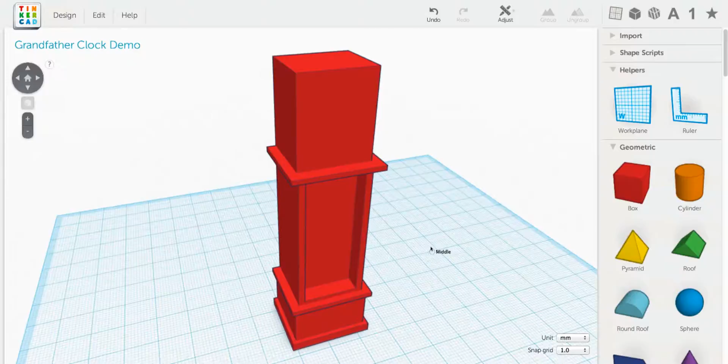So here we are, and we have the body of the clock. You can see I've already started adding a little bit of detail. I added a recess here. It's what's called when it's a hole but not all the way through, just sort of a recess in the body. That's important for giving things a sense of depth.

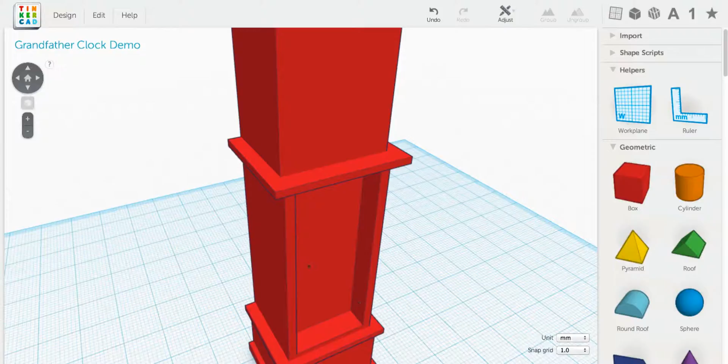You don't want it to all be flat just on the front. So it doesn't have to be very deep in order to get that to work, but we'll do that again up here. But first we want to create that molding that's on top of the clock, so do something that sort of looks like that.

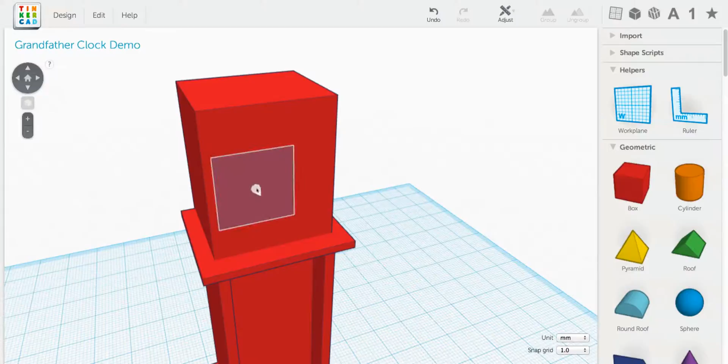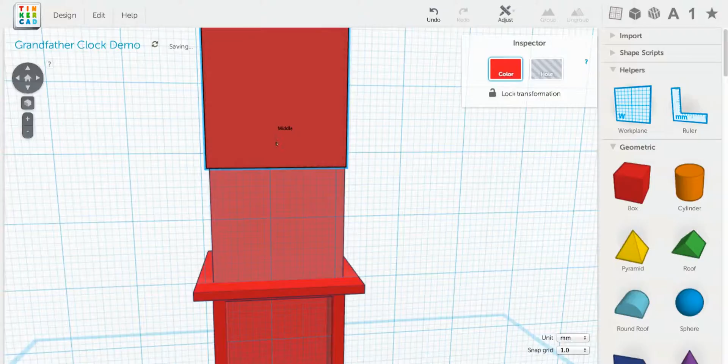I'm going to simplify it a bit, but to get started, we're going to bring out a box and shrink it down to be 2 millimeters deep. And then move it up here. And it needs to be a little bit wider than the face of the clock. Let's nudge it into position here.

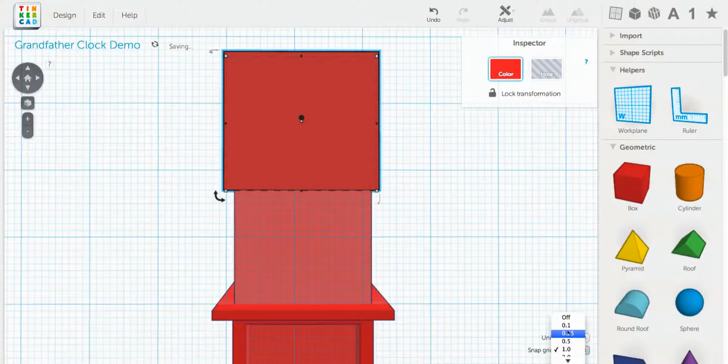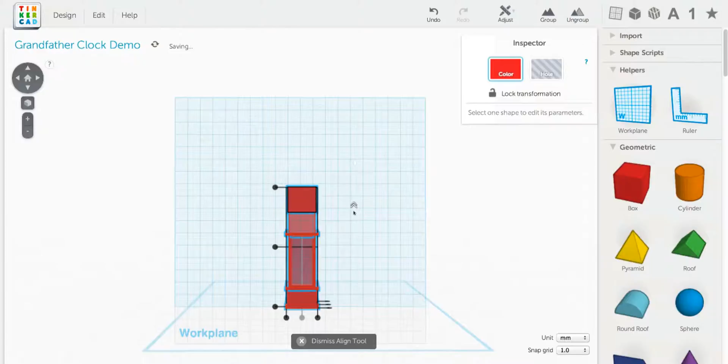We want to leave a roughly square area down here. Let me group all of that for the time being, and then center that ornamental piece on top right there.

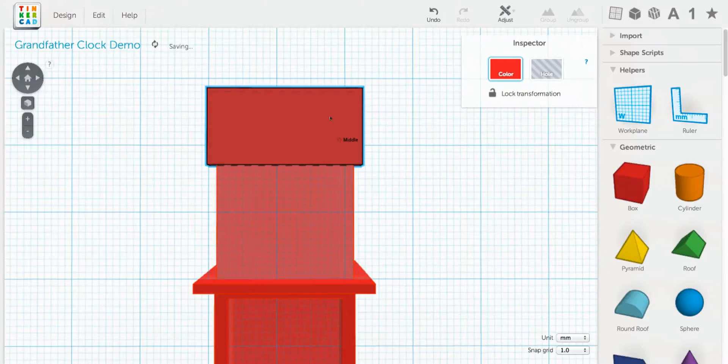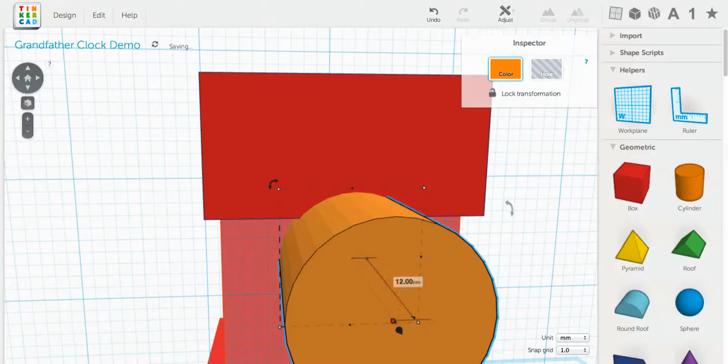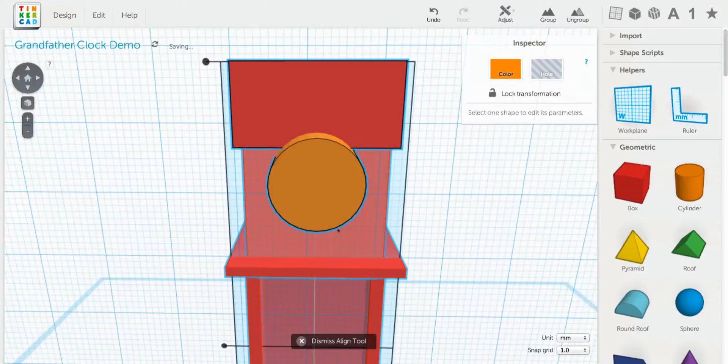Okay, line everything up. As humans, we're very good at seeing things that aren't lined up, so it's important that you line things up when they need to be. When they're supposed to be even on both sides, it's pretty important to make sure you've got everything lined up. Otherwise, it'll look fake.

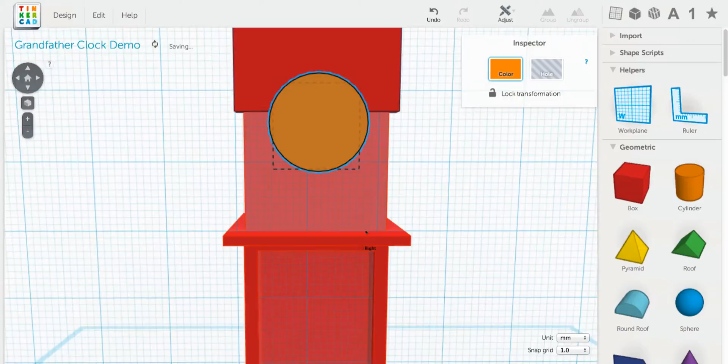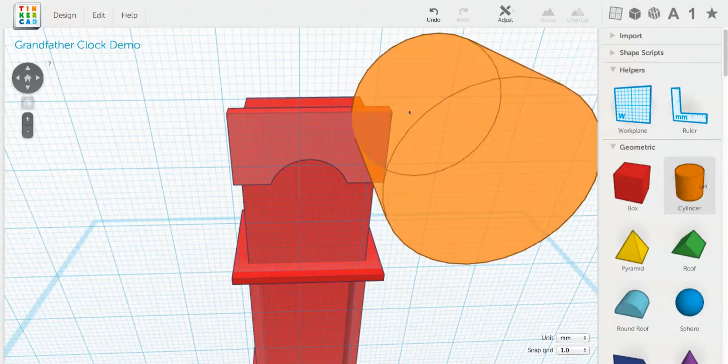Okay, so I like that. Let's do a hole. So to add the cutouts in the corner there, I'm going to bring out a couple cylinders and shrink it down till it looks pretty good.

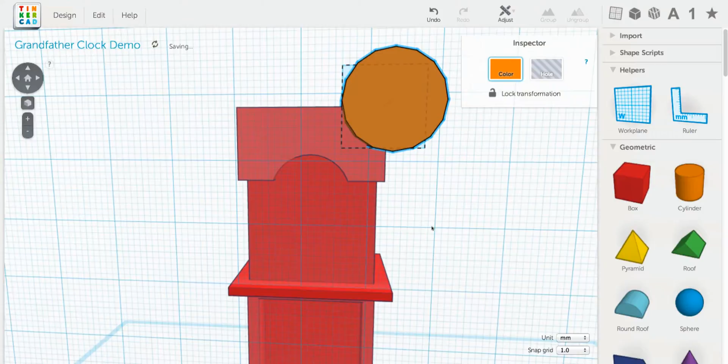Okay, that doesn't look too bad. Now what I need is for the middle of this to be on the edge of that. So let's bring out a ruler. Actually, let's move it over here, that'll be easier.

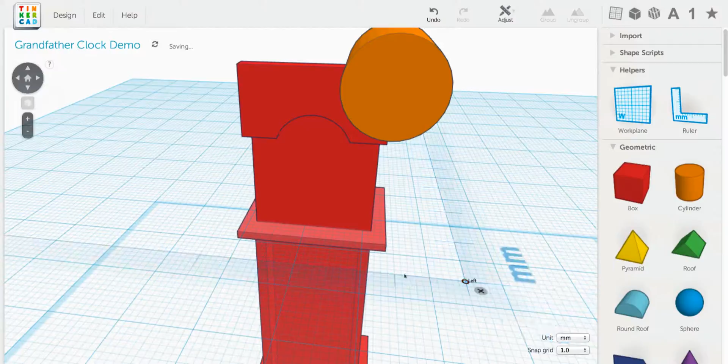So I have it set to midpoint, which is actually good, it's what we want. So to the midpoint of this, it's 23.62 millimeters. Let's make that an even number. It's okay if it's not in alignment, we'll make it in alignment later.

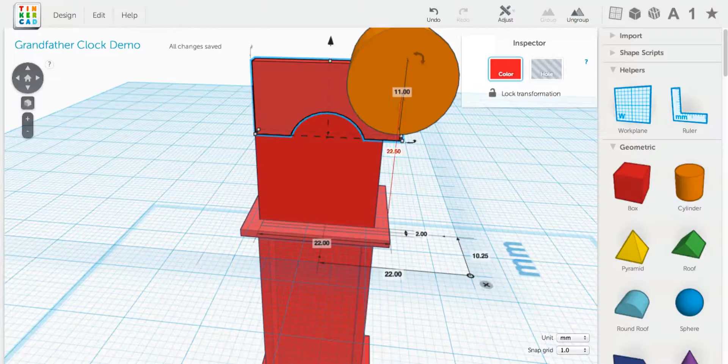So to the midpoint of here is 13. This is 22 millimeters wide, 22 millimeters away. Half of 22 is 11. If I subtract 11 from 22, that's where this edge is. So instead of 13, it should be at 11.

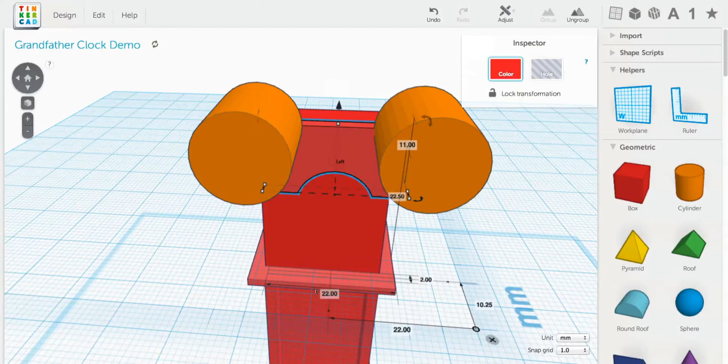And then I'm going to duplicate that, slide it over. That one should be—and I actually accidentally dropped it right in the right place, because it's going to be half of 22 is 11, plus 22 is 33. Okay, let's make these with a shift drag overlap, turn them into holes, and then group them with that.

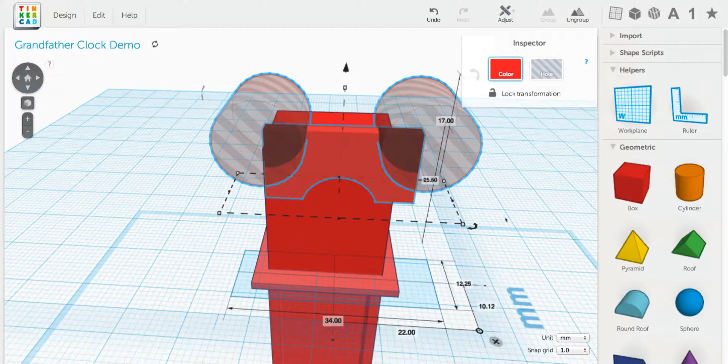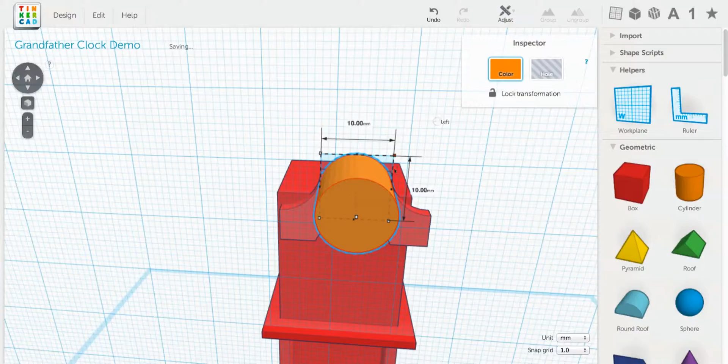Okay, so far so good. Now we're going to bring out another cylinder, and that's just about right. So let's get those aligned.

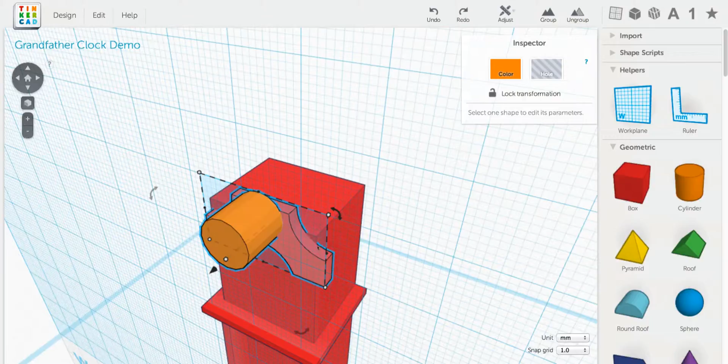Okay, we're going to merge these two things, so this one needs to be... I made a mistake there, let's undo that. Okay, with just that selected, make that 2, and then we're going to move it back 2, and it's otherwise in alignment the way we want it, so we're going to group those together.

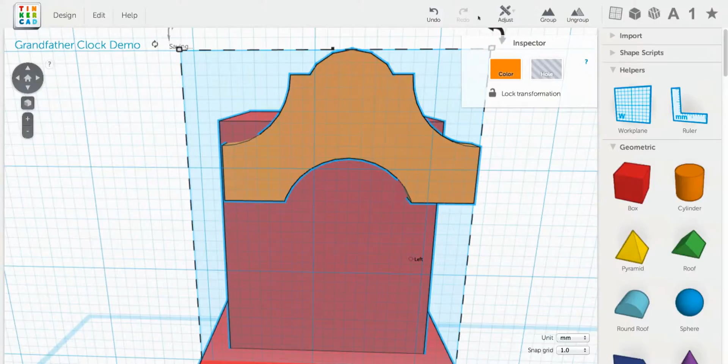Then I can align that with the main clock, and then shift drag that piece up so it's covering the top. Alrighty, so far so good.

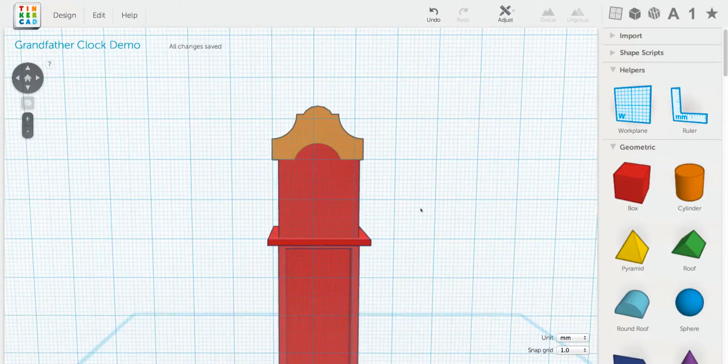Now let's make some more detail here inside of the clock face. Drag out a box, and I'm sure you know how this goes now. We're going to make a recess here.

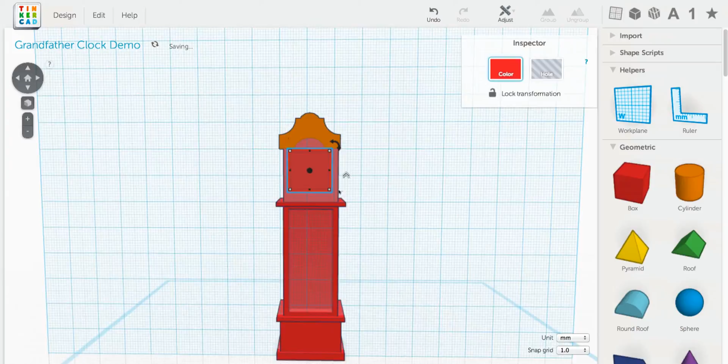Okay, so after a little bit of this and a little bit of that, we have the body of the clock. Now we just need to fill it in with some details.

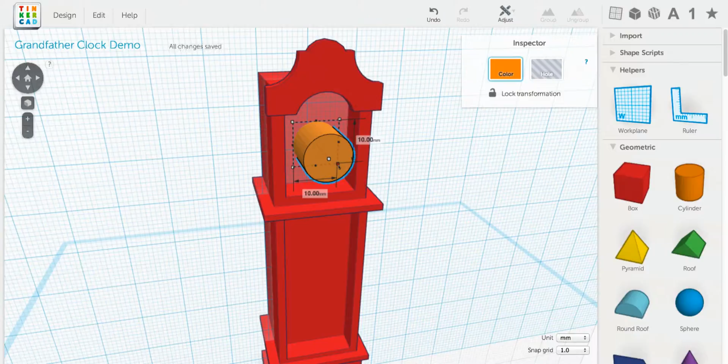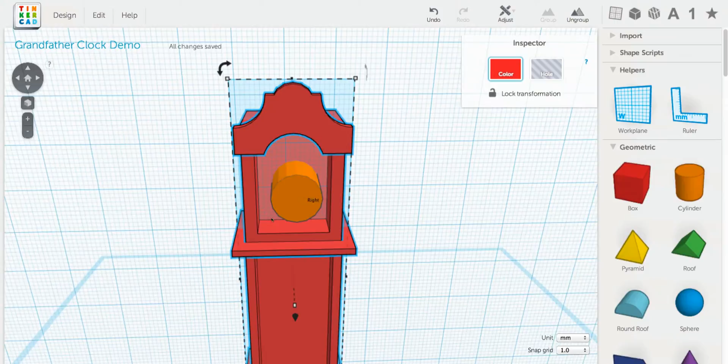Now the important part about that is that since this is going to be made on its back, everything needs to be touching the back. This piece, I think, is going to end up being a separate piece because it's unsupported. If it's laying on its back, there's nothing—this is like hanging out over air. So that might be printed separately.

But everything internal can't have parts that are floating over other parts. So even though this clock face is actually going to be pretty thin in real life, in our model it's going to be a cylinder that goes all the way into the back.

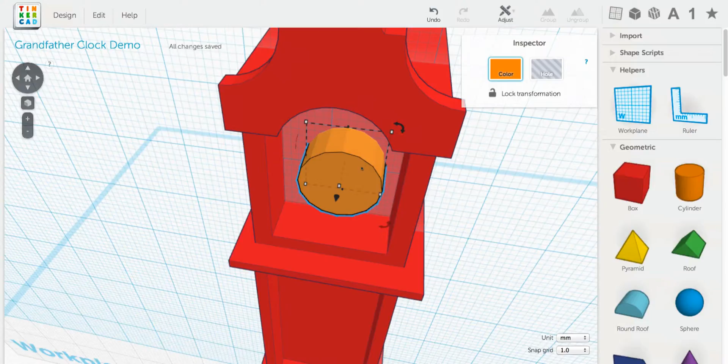So just keep referring back to your reference image to see what it looks like. I'm simplifying things a little bit—I'm not adding a couple of these details, I'm not adding the doors. But we need it to look like a clock on the inside, so I'm going to do that.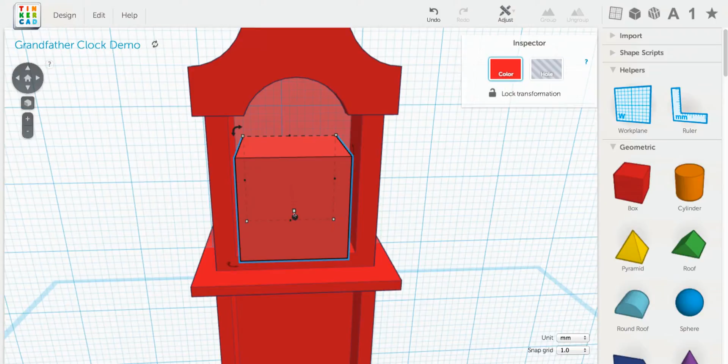Okay, after a little more work, I've got a good start there on the clock inside of the grandfather clock part. Now, looking at the model, we have the pendulum. Grandfather clocks aren't the same without a pendulum. And then these are weights hanging down from chains.

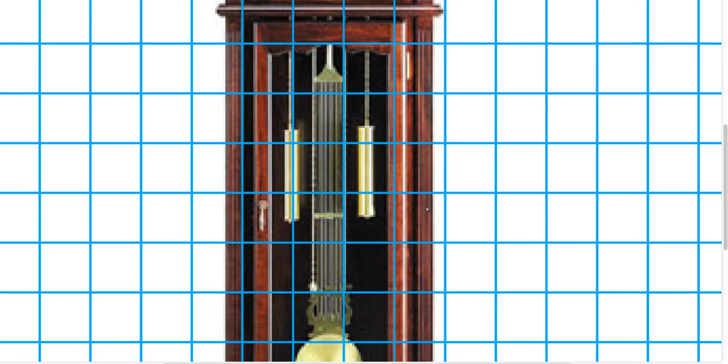If anytime you get a chance to actually look at something up close and understand how it's working and what it really looks like, you'll be better off modeling. So do your best with what you have and what you know. I'll leave it to you to go in—all you have to do now is add the components of the pendulum and the weights, and then change the colors, and you'll have your grandfather clock.